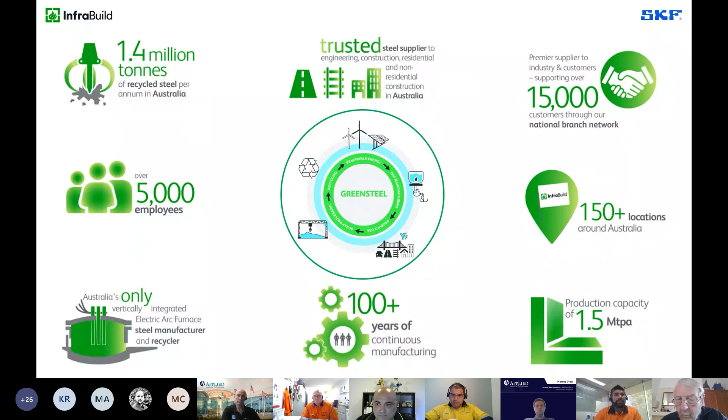Now let me get Brian Borg in. So Brian, I see you're based in Laverton. Where do we start this journey of reliability, condition-based maintenance? Okay, so the journey started with OPEX as well, the same as Greg. Around the same time, about 11 years ago, we were approached by the OPEX group to start a CM program. I applied for the job, got the job, and had a few mentors come in and help us set up.

So the best way to describe how we started was to go back and look at historical delays or breakdowns that we'd had. And what the OPEX group was able to do with all that data was to create a register of all our equipment and rate them for criticality, depending on how long the business would be down for and how much money lost if that particular machine broke down or had issues.

And they developed a software program that we still use today, which is the OneCare program. That's just a platform to enter all the data for the tests that we collect. As you can see on the slide, there's also risk ratings for each measurement that we take, and classifications on what the equipment is classed as. So if we have something that would stop the business for a day or 5 days, it would go into its own class. If something has redundancy, like a pump, it would go in a lower scale. Perfect.

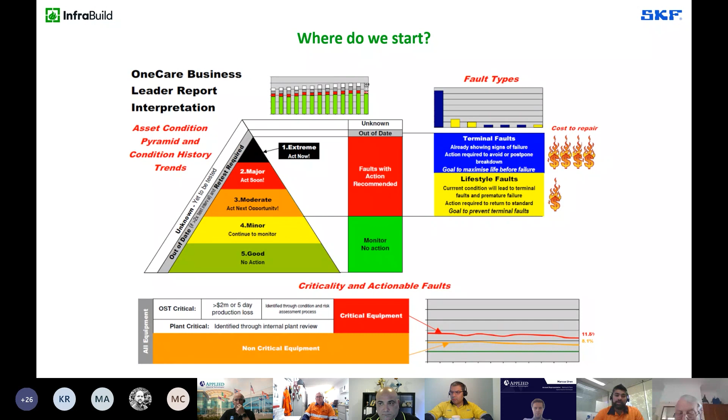So now we've got a list of assets. We've understood how they operate, what their history looks like, and what consequence it can have. We definitely need to do something about these assets. But then how do you select what technology? How are you getting data of these assets?

Okay, sorry, I missed the introduction bit. I'm Brian Borg. I look after the rolling mills condition monitoring at Laverton. We have 2 mills there, a bar mill and a rod mill, and over 1,200 assets across the 2 mills. Running the program with OneCare guiding what tests we do and when, we have over 93% compliance. We have around 8,400 condition monitoring related tests.

The data's all there on how they're split up. Inspections and major inspections during shutdowns are part of our list as well, including 286,000 shift inspections. We have a digital inspection done every shift, so twice a day, and a lot of data comes out of that from a shift fitter walking around monitoring the equipment like a millwright would do or used to do.

We do our own in-house oil analysis, so patch testing of our oil. We do our own precision engineering, so alignments and precision engineering on our mandrels that go onto our gearboxes. We also do online and offline vibration analysis ourselves, and in-house thermography, both electrical and mechanical.

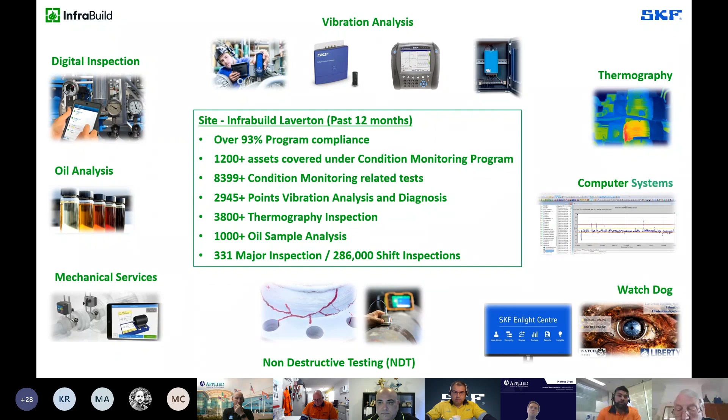Perfect. So now we've got all the metrics, the condition data and the performance data for the machines in one place. How do you measure your condition monitoring program? So you said 93% compliance. How do we achieve that, or how do we know it's achieving that? Okay, so we have a number of tests, as you can see in that top left-hand corner there. So a machine may be deemed to require vibration monitoring, oil analysis, and thermography once a month, every 4 weeks. This report looks at that and says, yes, the data was entered for that month for that machine, so it's in the green. The test was done. Okay, so that's the first part. Yep.

So there's a figure there that says we've achieved 90% of our program, or 93%, whatever. You can never really achieve 100% because you have a lot of machinery sitting idle and you can't test it. Yep. I was told when we first started, anything over 75% was great. As you can see from that top left slide there, we do the same work every month. We've got the same amount of machinery sitting idle. You could go around and start all those machines and get a test, but it's not easy while production is running.

Yeah, definitely. One good part here, Brian, what I have really noticed is the abnormal condition, or let's call them the failure modes, and it's picking up how many faults are happening, when and in what area. So how I see it, it's brilliant that you'll know exactly which 20% of the problem child is causing you 80% of the pain and the downtime. So definitely very fruitful. When we enter data in, it's not as simple as saying there's something wrong with the machine. You actually have to, from an analyst point of view, determine what the cause or the problem is, which makes it a lot easier for you to raise a corrective action and direct it to where it needs to be done.

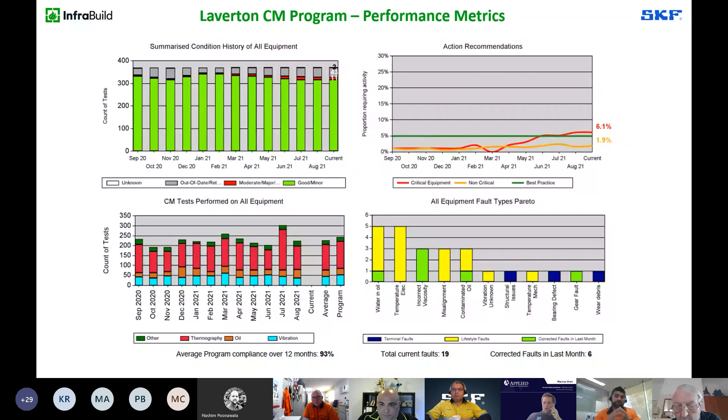Okay. So this problem is very recent. It's only a couple of weeks old. It's easy in our business to find a case where we have had an influence, because it happens on a daily basis. So the problem was our combustion air fan, which feeds fresh air into our reheat furnace for the bar mill.

It had a history of having a bearing defect or bearings becoming loose. They're on a taper lock, and the taper lock sometimes gives way and makes the bearing loose. The machine was actually on a monthly handheld schedule. We'd previously done that something like 6 days before the issue developed, so we weren't due to go back there for another month.

A shift fitter during his checks noticed that it was starting to make an abnormal noise. We then went down the line of trying to keep it running. We couldn't stop the mill. It was going to cost us 72 hours of unplanned delays. It sounded really, really bad, but we weren't sure if it was getting worse. On that same day, I asked to get another measurement. 6 hours later, the thing had tripled in vibration.

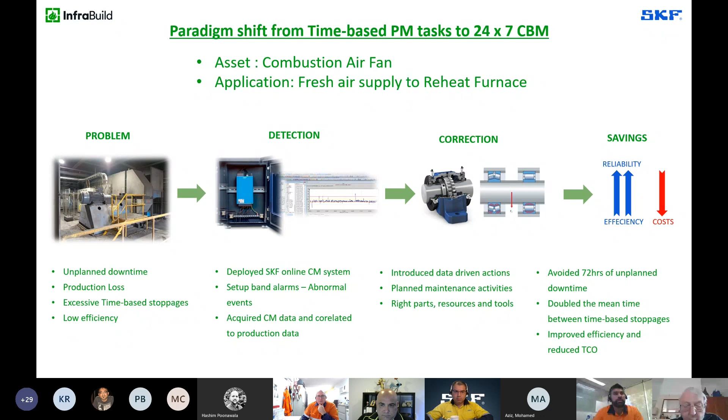Yeah, well, basically, from what Brian was saying, he adapted an online system that we usually have hardwired into being able to use it as a portable system, simply because he had it there available, and we were able to do that. But for those people who haven't got an online system yet, I've used an example here: on a monthly basis, we take data on this pump. It's a high pressure pump. It puts out about 1,200 to 1,300 kilopascals of water pressure. It's a 4-stage vertical pump, so it's quite a hefty bit of gear.

I do it on a monthly basis, go around, check it. And for this instance, it was one of those things where we've actually had one of these fail. We've got redundancy having a second pump there, but ultimately it's a $100,000 rebuild. Wow. And for basically a $2,000 bearing. So we're progressively moving to putting a lot of this stuff online. It's not as fast as we would like, obviously, so we still do a programmed maintenance check every month, go around doing VA, thermo, and just a check on the oil.

But in this instance, I'd been monitoring a slight change in the high-end frequency early warning envelope, and that went on for 2 months, and I was very cautious because I know these pumps have probably about 2 tons sitting on a bearing in a vertical format, so there's not much room for it to fail. It goes very quickly, and we are down for a lot of money. So as soon as the data changed in the handheld, I monitored it more often, and it was very quickly clear to me that we're going to have to get in and do this straight away. So we instigated a change out on the bearing.

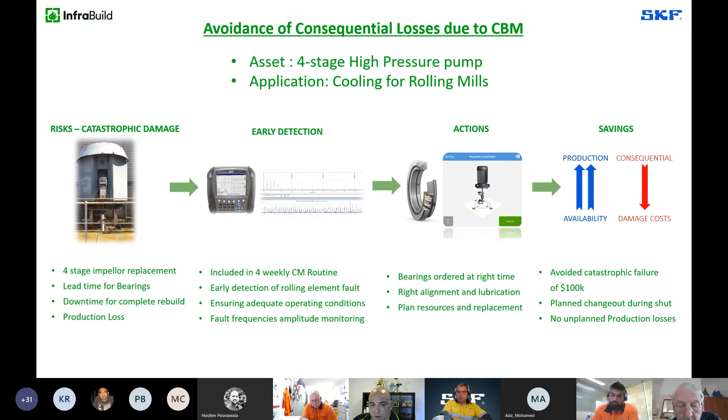Yeah, of course. Look, it's pretty incredible how much it's advanced in the last 10 years. We started off collecting data on different products, depending on when we were allowed to go into the mill by production. We quickly found out that we have a lot of variables in our business. If you can imagine running a car through a set of rollers every couple of minutes, that's what we do. That's where our equipment goes through. Sometimes they're small cars, sometimes they're trucks. So there's a lot of variable issues.

We quickly found out that if you set alarms based on an average across all products, you could easily lose something on a soft rolling product, because it was never going to break an alarm set for a higher stressed product. So with the technology now, we use the Observer software, and this is where the Watchdog program comes into it. We have alarms based on the product that we're rolling for the day. As soon as they change to another product, the software quickly adjusts the alarms based on that product.

So now I spend 99% of my day pulling production up and saying, what are you doing? What's the difference today? What's wrong? And usually there's nothing wrong. Then all of a sudden they'll have a stoppage for something else, make an adjustment, and the alarm comes back to green. Okay, so more operational rather than condition. Very much so operational. I can now trust these alarms wholeheartedly.

And just to give you one classic example, though this conversation is nothing related to commercial, this sensor in the slide, the wireless IMX1, I'm not sure, Vish, if you can put the pointer there, the IMX1. Just to give you a comparison, the price of the sensor is lower than a standard industrial general purpose accelerometer.

So for example, if it's a side entry standard crystal-based accelerometer, this wireless sensor is basically more, you could say, readily available from a pricing perspective, from a commercial perspective.

And then even from SKF side, one thing I want to mention here is when it comes down to deployment, previously, I know in the past what used to happen is that deploying a wired or wireless online monitoring system, it's an elephant of CapEx. It's basically a big beast of commercial arrangement. There is always a balance between how much you can spend and what value in return you're going to get out of the program.

When it comes down to us, we are very, very flexible there as well. From a business model point of view, we are open to CapEx or OpEx arrangement. So if you don't want to spend all the money up front, you have an option for OpEx arrangement as well. And the way OpEx works, let's say we can have a monthly arrangement over a period of 5 years. What it does is it brings an equal investment from SKF side as well, because we're not capturing the whole lot of the revenue up front. It means that we are equally invested in the program, which means that our skin is in the game as well. So I think, Vish, that's where I can see the scalability from an industry point of view.